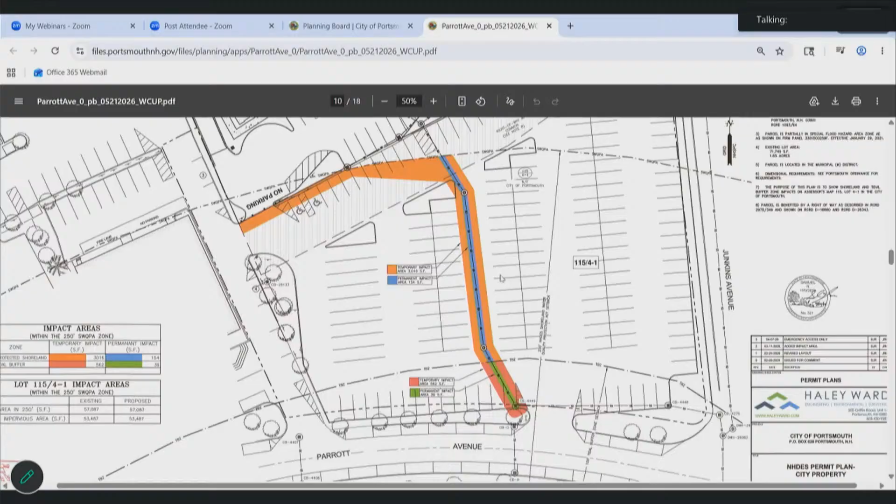Any other questions of the applicant? Okay, I'm going to open the public hearing on this. Anybody here or on Zoom wishes to speak for or against this CUP application?

No one's raised their hand. Anybody here? Last call. Going to close the public hearing.

Make a motion, we vote to find the conditional use permit application meets the requirements set forth in section 10.1017.50 of the ordinance and adopt the findings of fact as presented. Second. Discussion.

I'd just like to point out the benefit of having this happen is that the city now has a developer who's actually going to help us with our stormwater sewer separation. That's what's going on here. This was a benefit to the city because we're now going to have a section done that would have been at our cost, now done by somebody else. I want everyone to understand this is a true benefit to the city, and the environment, and our sewer plant.

Any other discussion? All those in favor? Aye. Any opposed?

I make a motion, we vote to grant the conditional use permit as presented. Second. Discussion. All those in favor? Aye. Any opposed?

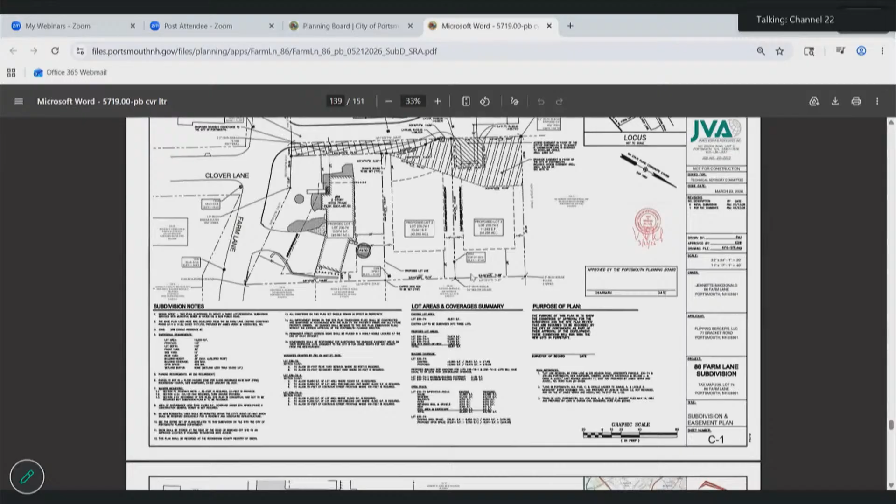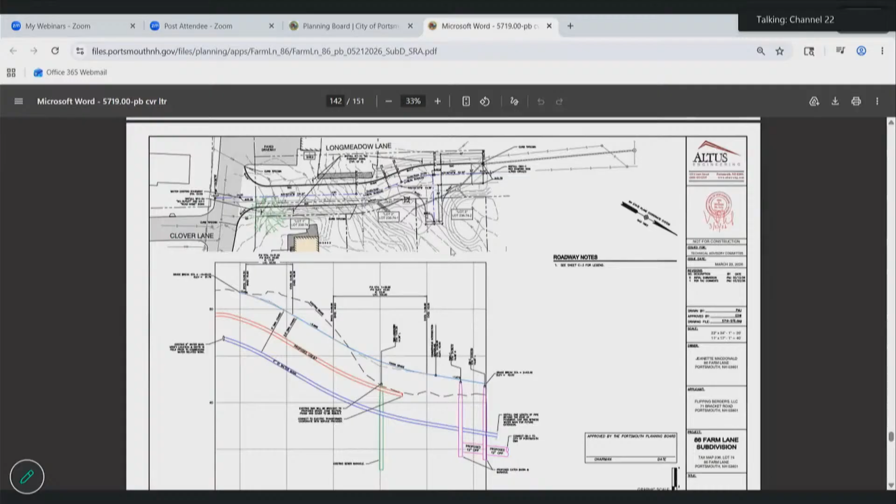For water, you can go to the utilities plan. There's existing water in Farm Lane, and we're proposing a new hydrant at the front of Farm Lane in this roadway. That will actually help the entire neighborhood because there isn't a hydrant nearby. We have a smaller 4-inch service servicing the two homes. We went with a smaller service as approved by DPW because if we went with a 6 or 8-inch line with two homes, it would end up with stale water and wouldn't get enough turnover. So we have only a 4-inch line with a blow off at the end to serve those two homes.

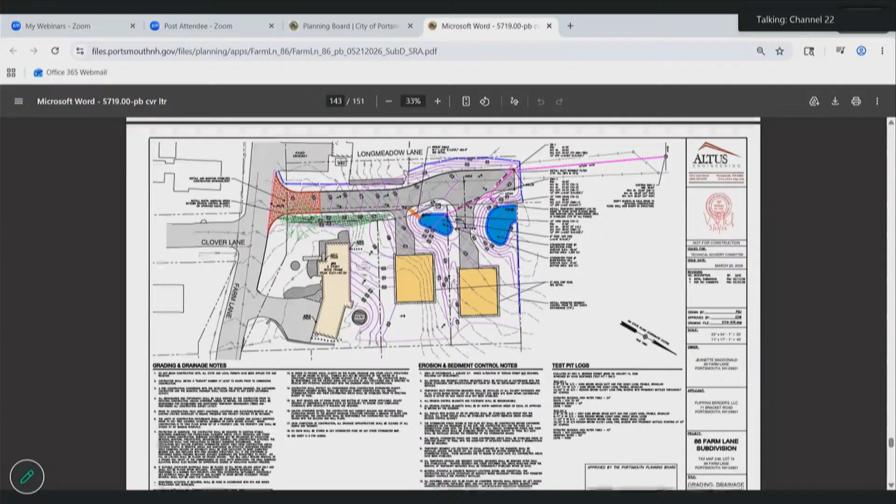We're proposing a new utility pole on our side of the road and then underground utilities going into the site, with a transformer near the hammerhead. I believe there's an error in the staff memo. Peter and I spoke about it — it said we were asking for a waiver for overhead utilities, and that's not accurate. We're not proposing overhead utilities.

The existing site topography — if you can go to the site grading plan, that would be great, Peter — that's 138 in the package. Right now, the way the roadway was constructed, or the subgrade was constructed for the roadway, it created a dam and inhibited any runoff from leaving the site. So we have lower, I'll call it the western corner of the site, which creates a dam, and all the water infiltrates into the ground so that we have very little runoff leaving the site.

What we've done with the stormwater management design is provide two bioretention basins on the property that will treat the runoff from both the roadway and the lot development, with an overflow that goes down the city right of way and ties into the city drainage to the north of the site. That runoff runs through a culvert that was part of when the roadway was roughed in — it's a culvert crossing, and it's part of the Hodgson Brook watershed, just so it's very clear.

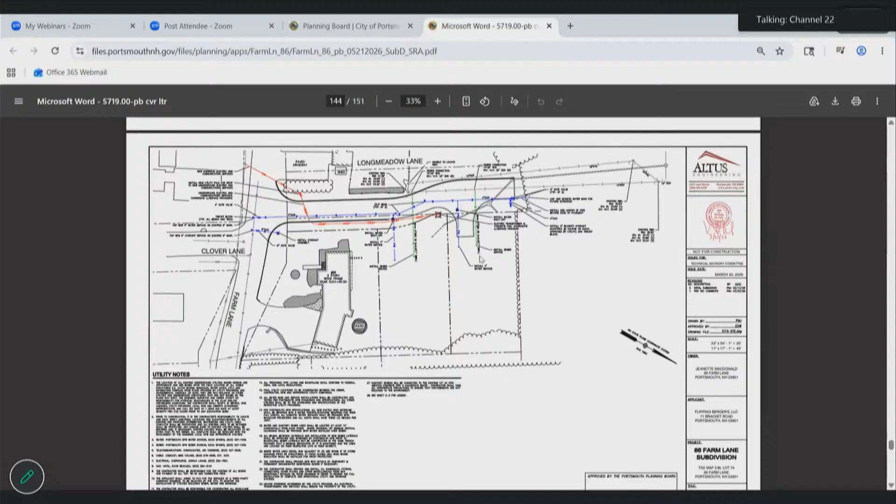The last thing I want to go into — and I know the staff memo didn't support this waiver — is that this is a subdivision, and because we're creating more than two houses, ultimately three houses, we have to go through site plan review as part of this process. Staff is recommending, and it's been tradition, that the site plan be recorded. Well, the site plan here is almost exactly the same as the subdivision. It doesn't have any pertinent information that 5, 10, 50 years from now would cause anything but concern or confusion.

These are the two boxes shown as the potential homes, not defined as what they will be — they're potential homes, and all the information that's pertinent for deeds, recording and so forth is on the subdivision plan. So we'd like the board to strongly consider that the site plan for a residential 3-lot subdivision not be recorded, and that you just record the subdivision plan. If you find there's some notes on the site plan that would be applicable — I don't think there are — we'd be happy to put them on the subdivision plan. I think having two plans recorded would be very confusing for this development.

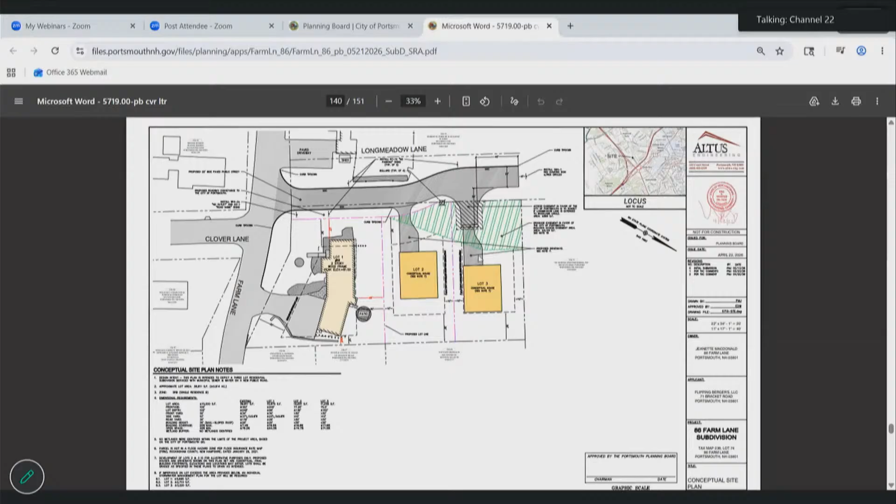Got any questions? Which sheet would you suggest being recorded? The previous sheet — it's 134 in the package, so it's that sheet right there.

Talking about C1, the subdivision and easement plan. I'm looking at just the Farm Lane subdivision. What's your sheet number, Eric? It's C1, shouldn't it? Yep. C1 I have. C1, got it. Yeah, C1.

So this would be the sheet that would be recorded. It has the easement, it has the hammerhead, that would be on the drainage easements, it has the setback, has the lot areas, it has the road layout. And what you're suggesting is when the homes are actually designed and laid out, it would be no different than a vacant lot, that they just need to comply with zoning. You would never record the location of a home on a residential subdivision.

Now, if this were an apartment complex and it was truly a site plan, I think it's appropriate that the plan would be recorded, because we're not creating lot lines on a subdivision, on a site plan. This is where we're creating lot lines and only lot lines. What's the objection to recording the site plan? Just confusion? I think it's redundancy and it's confusion.

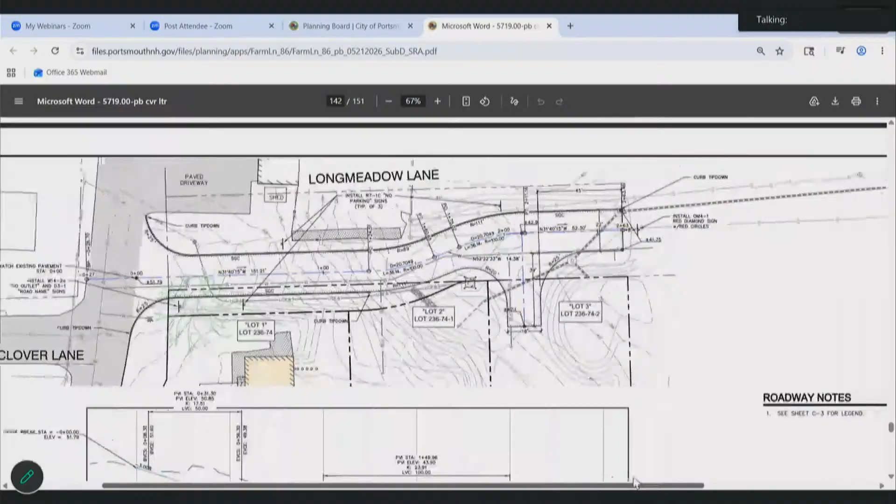So the cross culvert is the diagonal going across the proposed road? Is that the one that goes across the existing right-of-way? Across the existing right-of-way, but the proposed road, the end of the proposed road, well, the end of the...

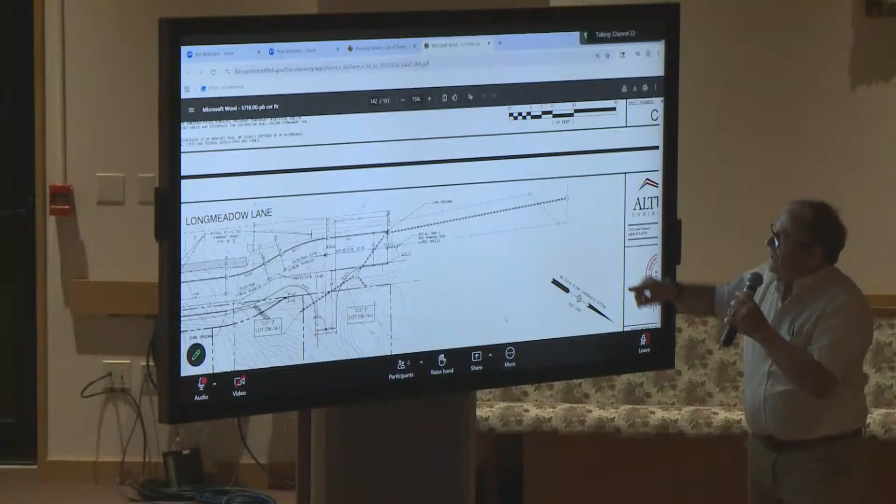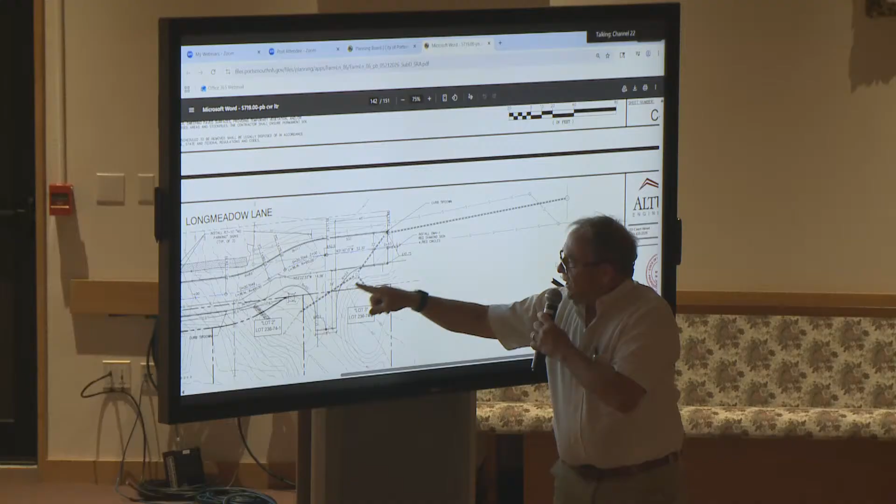So this is the existing drainage that's there. We're going to build this in the right-of-way, and this is where the roadway ends. This is the drainage that's actually on both lots, this is the hammerhead, so the roadway ends here. We've got drainage infrastructure that's partially on the private property, and then in the right-of-way, heading down and connecting into that existing drain manhole. So that was my question.

I think there are probably feelings from DPW that they wish this was a private road, because now as a public road, it will probably need to be maintained by the city. Right.

Did you want to add anything on the site plan recording? Well, I was just wondering if it could be called the subdivision site plan, easement plan. We can talk to the surveyor who stamps it, but I don't see a problem why it can't be called subdivision site plan. I mean, I don't know if that would solve it.

In addition, where needed, ditches along the bottom side of the trail, the low elevation side, downhill, will be used to get water away from the trail, following the natural contours of the terrain, with as little modification of the existing site as possible, needed to achieve a dry, stable section of trail.

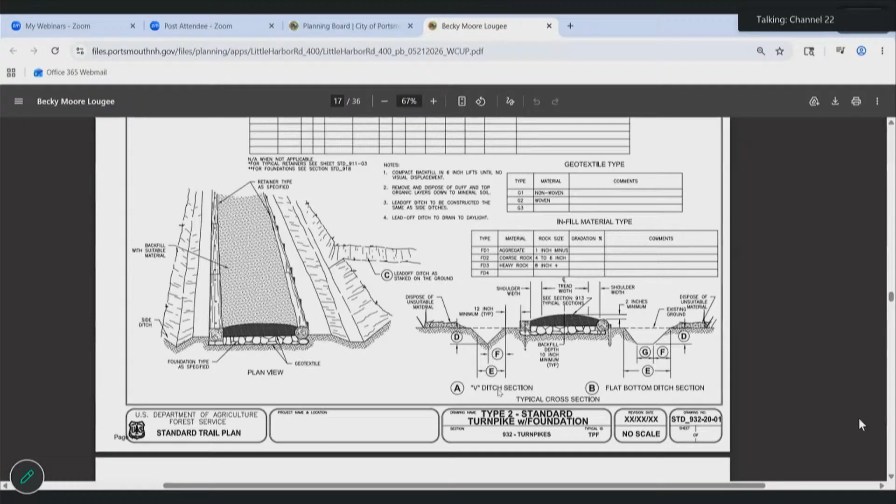This section of trail is in the 100-foot buffer of the tidal wetland of Sagamore Creek. The site was delineated in 2019 or 2020 for a waterline project for the Carey Cottage by Joseph Noel, New Hampshire certified wetland scientist. He returned in March of this year to revisit the site, confirm that conditions hadn't changed, and redelineate the highest observable tide line for the tidal wetland adjacent to our project.

Our project would be following the standards for construction of a turnpike as outlined in the New Hampshire Best Management Practices for Trail Construction and Maintenance manual, published by the Department of Natural and Cultural Resources.

Some turnpikes in certain circumstances use low retaining walls when the trail surface needs to be raised pretty high above the existing ground to get the tread surface above the water table. In this circumstance, that's not needed, so we would be building a modified version of a turnpike that does not need retaining walls on either side, because the surfacing will retain naturally, as it will only be raised a few inches above the existing trail surface.

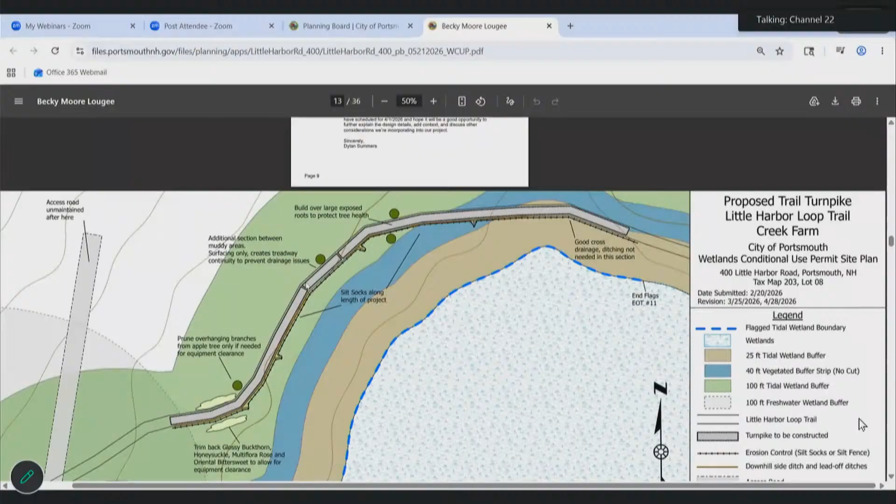Since then, after discussions with our contractor, we have decided that it would be best to also include the center 30 feet. If you go to the current site plan, you can see there's a middle section, 30 feet, that we've included, making the total section we're addressing 300 linear feet, and about 5 feet wide, meaning about 1,500 square feet.

The reasoning behind including that section is to create a contiguous tread surface through that section of trail, and especially so that the section where we weren't going to build the turnpike wouldn't become a new low spot that could eventually have mud and wet problems like the current trail has. So we're proposing that change for a better outcome for this project.

Additionally, we've had some figuring out where we were going to stockpile material during this project.

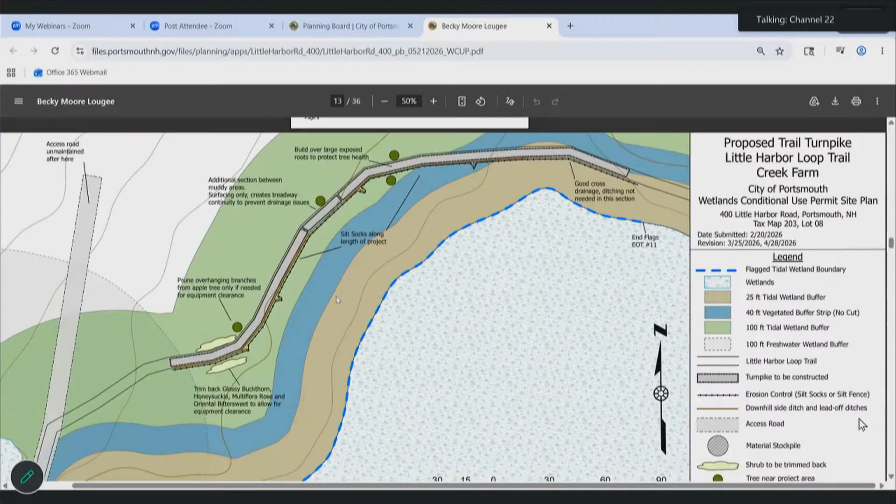It's not visible on the site plan without changing the scale, but there's a parking area right at the bottom. Unfortunately, we leased the Carey Cottage to another organization, and those parking areas are used by apartments, so there's pretty limited parking. We can't use those areas for stockpiling materials, so we'll be stockpiling on the lawn just next to those parking areas.

About a third of the area we'll be stockpiling material is inside the 100-foot buffer, so there will be some additional temporary impacts. We'll be using silt fencing to contain that stockpile area and make sure it stays contained to that zone, and it's on existing lawn.

And I think that's all I have to say for now. I'm happy to take questions. Questions of the applicant?

There's an extra 150 square feet that was not presented to the Conservation Commission. They did make a couple of recommendations and conditions, suggesting mitigating the use of the existing trail along the shoreline in future planning efforts to reduce buffer impacts. Do you think this extra 150 is aligned with what they were suggesting there?

The owners would like to add just over 1,000 square foot addition to the building in the rear. This addition meets all your setbacks. We meet all your open space and building coverage requirements for this zone. This property is located in your Historic District, and the architects, McHenry Architecture, have gone before the HDC and received approval for the design of the building. It's also located just barely in the 250-foot shoreland protection setback, for which we've also received a shoreland protection permit from the state already.

We've been to TAC, received comments, and they've recommended that we come before you. We've actually already addressed their comments on the plans that were submitted. So it's a small office addition in the rear of the building. There's no change to the front of the site. The part you see from the road will never look any different. It's the same parking layout, same building, same utilities. The only work being done is in the rear of the site. Happy to answer questions. That's all I have.

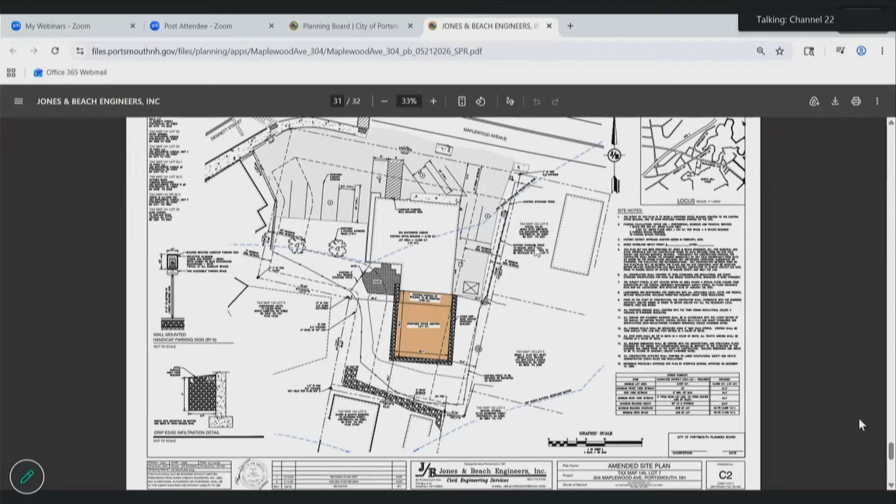If you could speak to the abutters' claim that there was a fence put over the property line. We have a neighbor to the east with a chain link fence running along a portion of the lot. There may be some discrepancy as to where the property line lies. We wanted to remove the fence and build a new stockade fence, but after getting the abutters' comments, the owners decided to leave the chain link fence where it's located and add a stockade fence on our side, which doesn't disrupt their use. They have animals, dogs, and didn't want issues removing the fence during installation, so we agreed to keep the old fence and put the new one right against it, so it looks good and doesn't disrupt their life.

Fences make good neighbors.

Did your parking calculations change at all with the addition? They technically require more parking, but we have enough on site to accommodate that based on the square footage and existing use. They don't feel they need more parking either. They have a certain number of employees, currently a little stuffed into office space. This just allows the existing employees to spread out. They're not even adding any staff, they just need more space.

Any other questions of the applicant? Just to clarify, the parking requirement does go up, but you already have parking present to accommodate that. Yes. Okay, thank you.

Any other questions? Thank you. Going to open the public hearing. Anybody here or on Zoom wishes to speak to, for, or against this application? No hands up. Last call. I'm going to close the public hearing unless you raise your hand. Closing the public hearing.